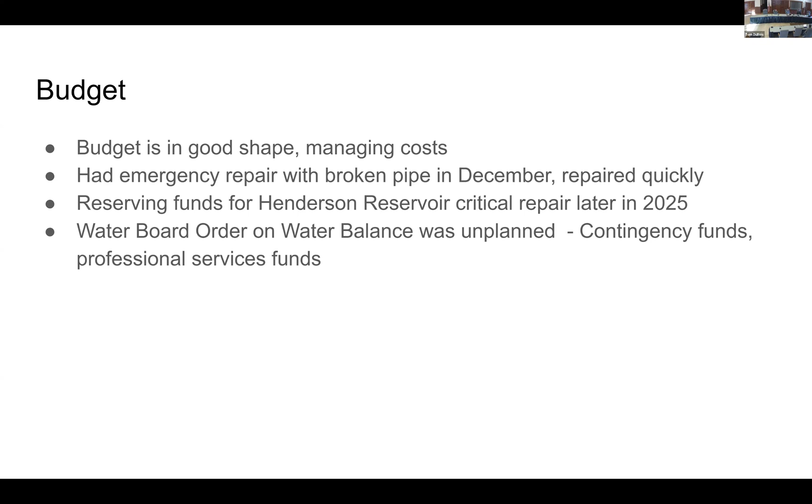Derek, who's the city attorney for Sutter Creek, is kind of ramping up on ARSA. Frank is starting to share agreements with him, so I've basically asked Derek to help me get these agreements over the line with AWA. And then Frank is still pushing on the CDCR front. Frank's the ARSA attorney. Okay, so that's it for kind of the general update.

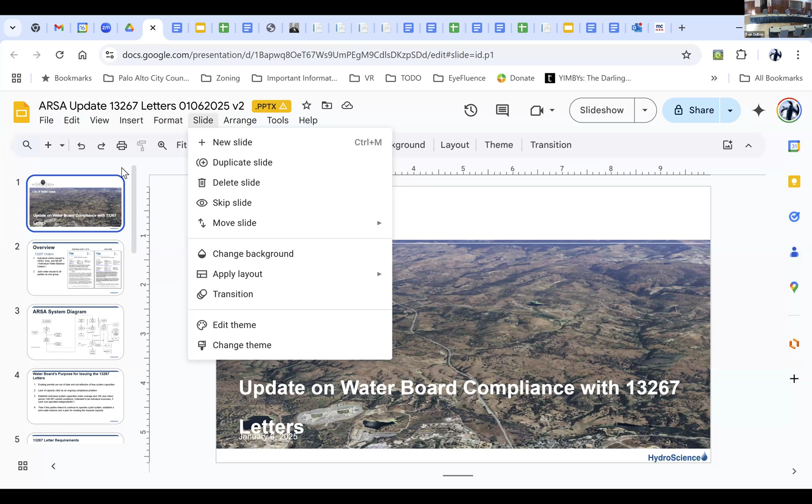So we got these water compliance letters. We basically retained HydroScience, who worked on the ARSA project and on Sutter Creek's master wastewater plan. We have Stephen online, who helped do a lot of this analysis. So we'll go through this presentation.

Stephen, you there? Yep. Thanks, Tom, and thank you for having me. I think you did a good job introducing everything in the background, so you can go ahead to the overview. Next slide, please.

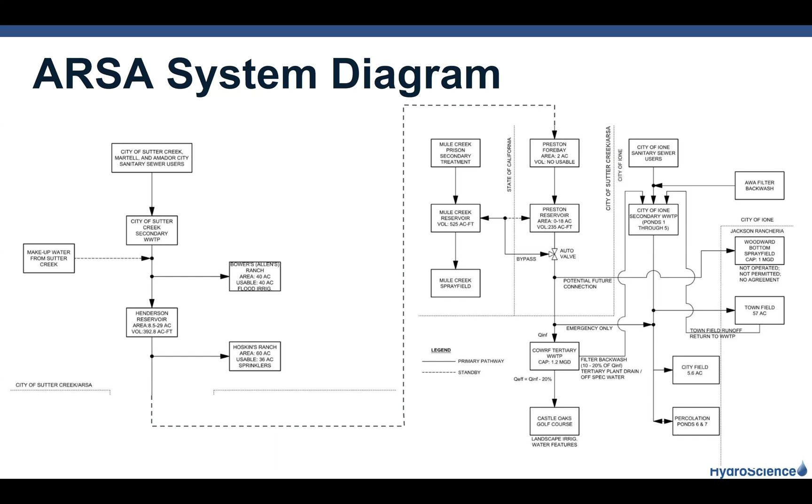Possibly in 5 years or even further along, which would affect ARSA because it'd mean ARSA could send less water basically to COWRF throughout the year.

And this exercise basically asks us to look at a 5-year forecast, but it seems like really the 5 to 10 year is where we're really potentially going to run into issues. There's a lot of new developments in Ione beyond the 5 years, but potentially we're doing this exercise for the water board, and then there's the reality of what's going to happen after 5 years.

Yeah, to fill in some blanks. So the AWA, the backwash in Ione, there is a thought they may be running that water out to the mine out there. If you probably know some of that.

I want to talk out of turn here, but I know Woodward Bottom, if you don't know, that pipe is upsized at 30 inches where it connects into the Ione plant, because it does connect in there. It's not a hard connection, but it's stubbed out there. That was envisioned to be a chlorine contact chamber at some point if it was needed for extra capacity.

I talked to the operator on the campaign trail, and I don't think they were going to plant alfalfa down there. It sounded like more like a Sudan grass or something. It'd be a little bit less water consumptive, but it would definitely take up some water. But I don't know if you've already talked about all this.

I'm sorry if I'm... well, it's kind of weird. The pipe there was built by CDCR. I know, I was a part of it. So again, there's also this question.

That fostered that thing right along, so I could give you more details if you want. So there's some weird things where it's like owned by CDCR, potentially operated by Ione, and people are asking, well, if we connect this up...

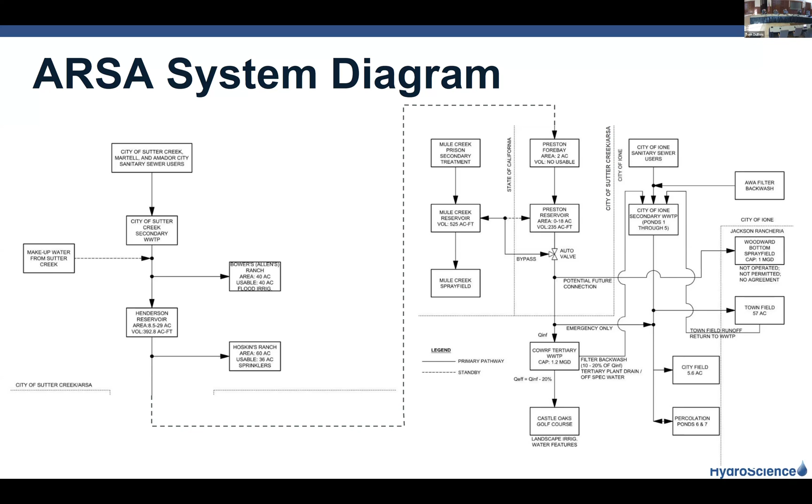I've heard that they bypass the permitting process. Is that true? I don't believe that's true, not on my end anyway. I don't think so, it was a state project. I hope they did, I don't think they would. I wouldn't think so. I have heard that. Yeah, I hadn't heard that before, but not to my knowledge anyway. I'll say that in the microphone.

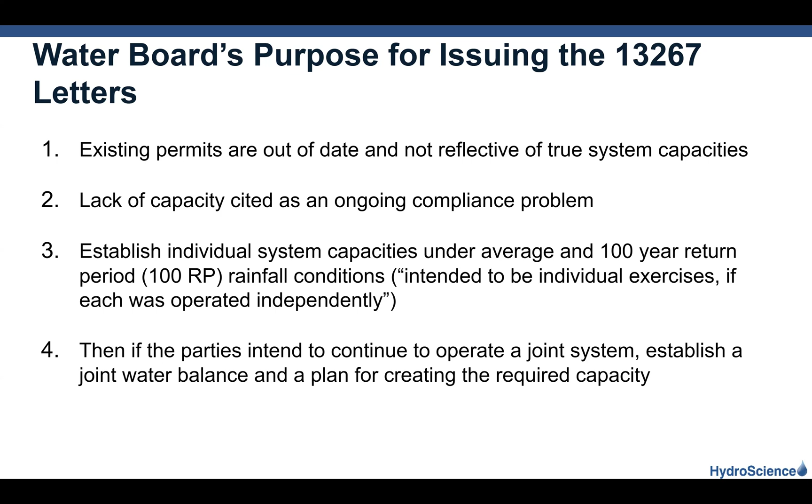So these requirements for the 13267 letter, they pretty much applied to both our individual order and also the joint order. We have to look at our current flows and conditions, and the forecasted flows and conditions within the 5-year period, then look at where our land application is happening, how many acres, what's the rate, what's the climatological conditions, like the 100-year return period rainfall, and then look at the past 5 years of data, certify it, and submit it.

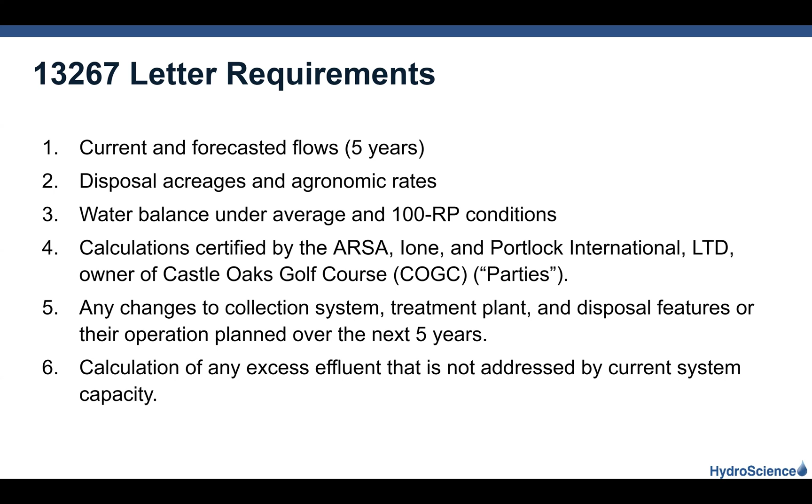So we've done all of that. Now it's crafting what does everybody's outlook look like in 5 years, and are there going to be reductions at COWRF? How much can we accommodate from CDCR at COWRF and ARSA at the same time? And pretty much identifying if there's going to be an issue at the end of our calculations. So next slide.

So looking at our flows over the next 5 years, it looks like it's a very small amount of average dry weather flow growth. It's only 2.17%. So by 2029, we're looking at about 0.319 MGD.

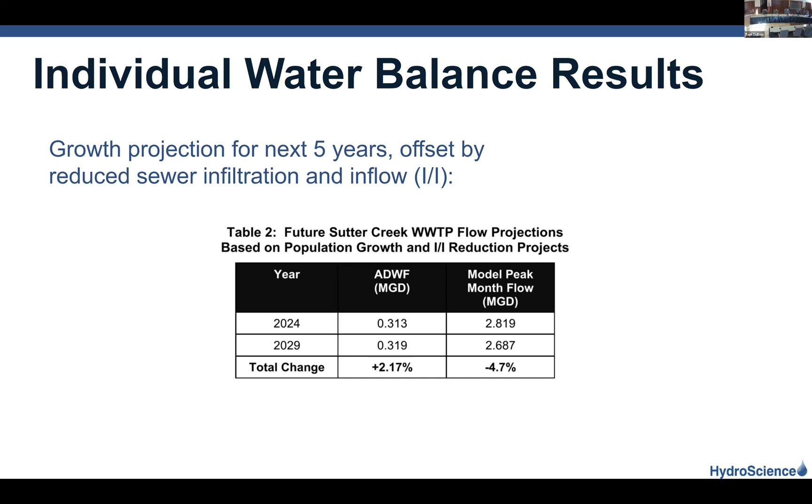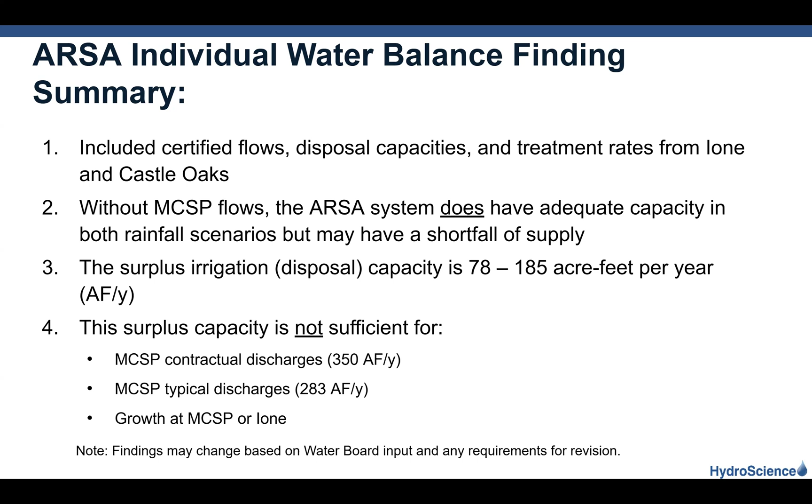They also identified that they could have higher flows depending on their occupancy, but we're only modeling the 5-year projected flow, and those other numbers are based on when there was overcrowding in the prison system 10 or 15 years ago, which was identified by CDCR as not really likely to happen unless there's been a really large change in government policy, which would be unable to even be predicted.

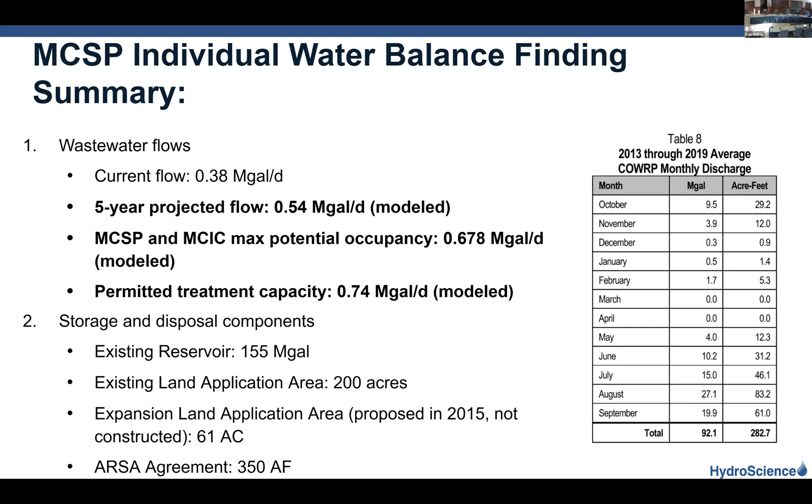If I find out, I'll let you know. I just got to figure it out. Great.

All right, so moving on. So looking at the MCSP results, it looks like they are able to identify a few issues.

It pretty much pointed them in the direction that they're going to need to utilize the Castle Oaks golf course and continue to depend on that, without any identified large-scale expansion of their facilities.

During our meeting with them, they identified it was approximately 40 acre-feet at their lower projected number of 0.54 MGD, and it would get significantly higher if we use any of the other flows, like 0.67 or 0.74 MGD.

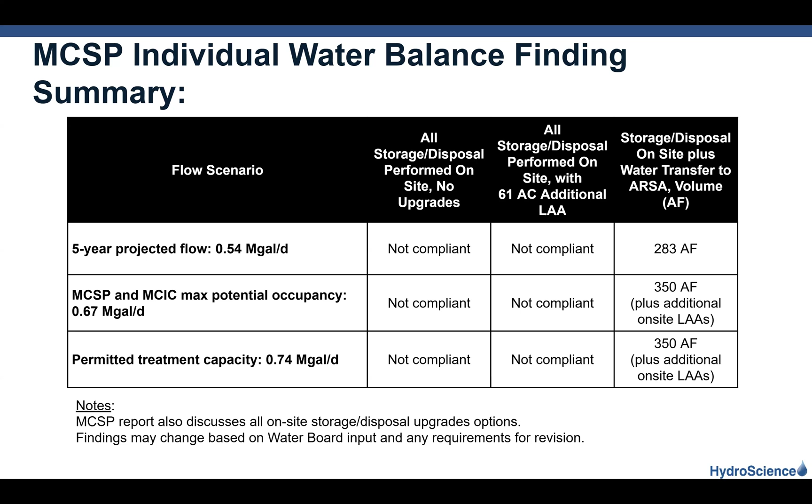Rounding out the presentation here, basically ARSA can take between 78 and 185 acre-feet from Mule Creek State Prison under expected conditions. However, MCSP has a significant need to continue to dispose of 283 acre-feet and possibly expand it even more.

We've also identified that it's likely MCSP will need to expand their use of the spray fields on their own site. Ione is still working on their water balance and their discussion with the water board of their percolation beds for disposal.

We're also identifying any reduction in the COWRF capacity based on the upgrades to their backwash flows and any other efficiencies, so basically refining how much water we can actually send to Castle Oaks Golf Course in a given year.

All parties have indicated that they intend to participate in the joint water balance, and we still appear to be on track to submit the joint water balance tech memo by May 1st, 2025.

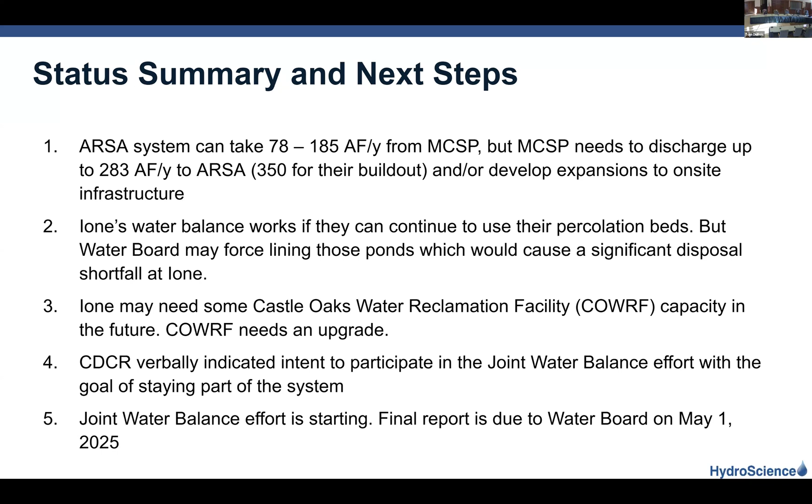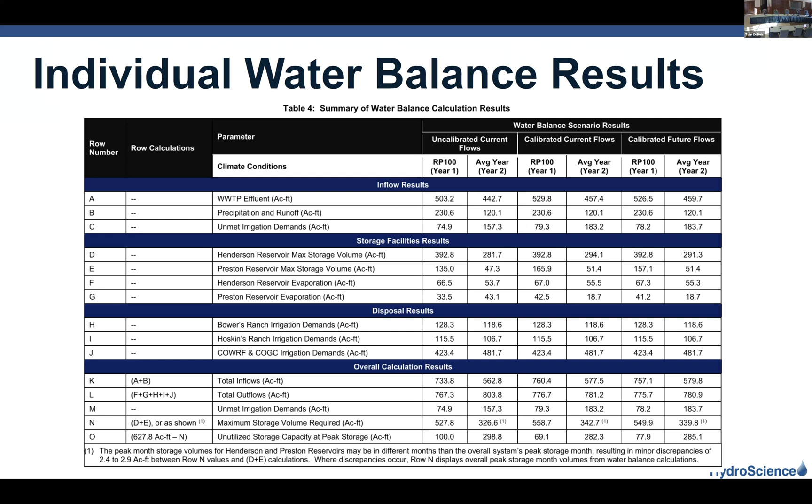It's 420 to 480, so like 480 acre feet max. Jim, do you remember, did we take most of your water every year or no? I felt like we took the prison's first - I thought we took yours first, right?

Remember, if you discount the years where there were some issues with the lawsuit and all that came up - that's fair - no, actually, if you go back, there was a pretty thorough study that showed for years they were not taking the contractual amount. I could dig up that letter.

Sean Rebay compiled some pretty good statistics that showed why this system, over the years, little by little, the water was backing up because they weren't taking the contractual amount. Whether it was because they couldn't or didn't want to, I can't really answer that question. Or they just didn't have the capacity. I'll try to dig that up.

So, in answer to your question, I don't think they've ever taken 300 acre feet from ARSA. Part of the contention was that one year we needed more and couldn't get it. Well, there was a drought year - maybe we just ran out of water. Correct, there was no water in Henderson - well, there was water, but it was down to the sludge, and that wasn't good analysis for anybody.